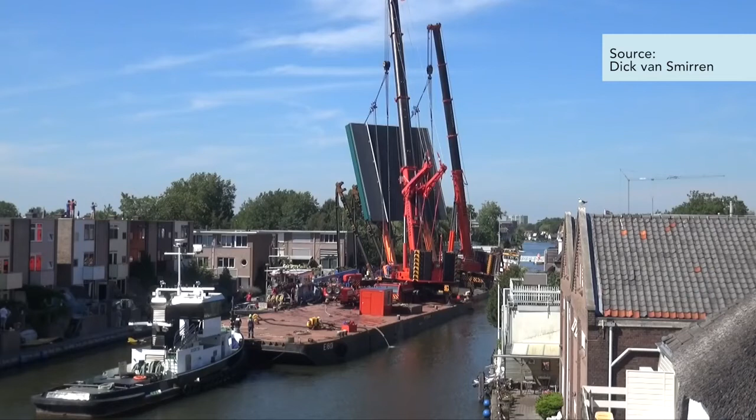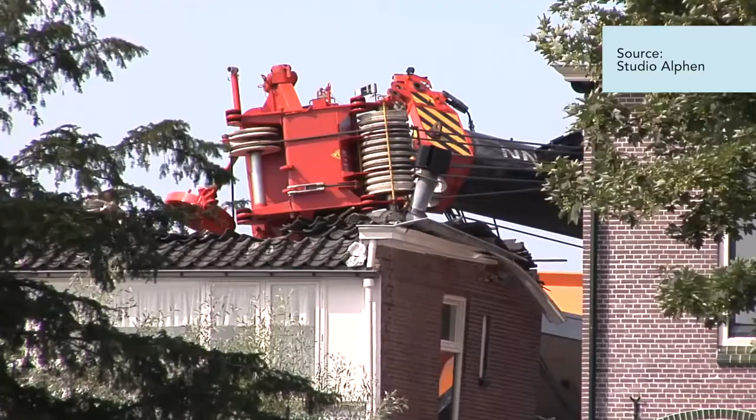On the 3rd of August 2015, a lifting rig of a section of the Queen Juliana Bridge in Alphen aan den Rijn capsized. Both cranes and the lifted bridge section fell on the surrounding buildings. Many were completely destroyed. Miraculously, no persons were injured.

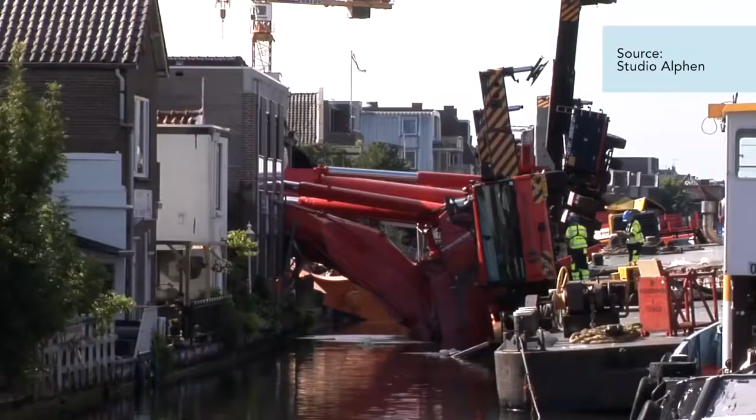Why did the lifting rig collapse? How did the parties involved assess the risks of this complex operation, and how did they manage the safety risks for the surrounding area? The Dutch Safety Board started an investigation into these questions.

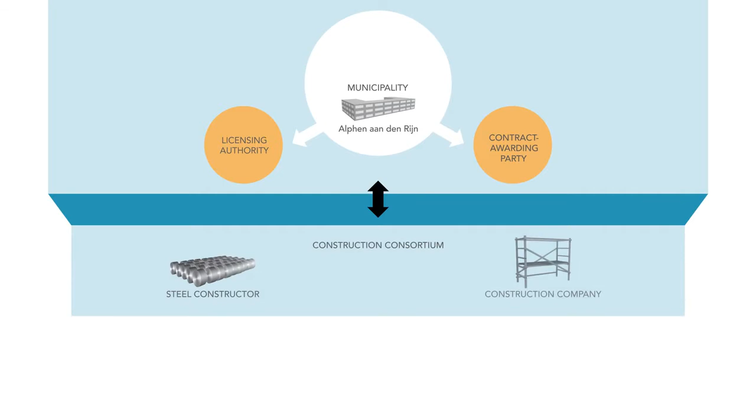The municipality of Alphen aan den Rijn commissioned the renovation of the bridge to a consortium of a steel constructor and a construction company. The steel constructor hired a crane operator to lift the bridge section. The crane operator subsequently hired the barge operator.

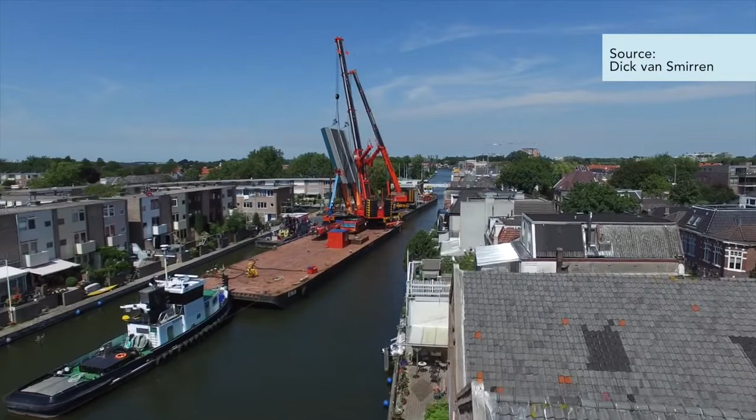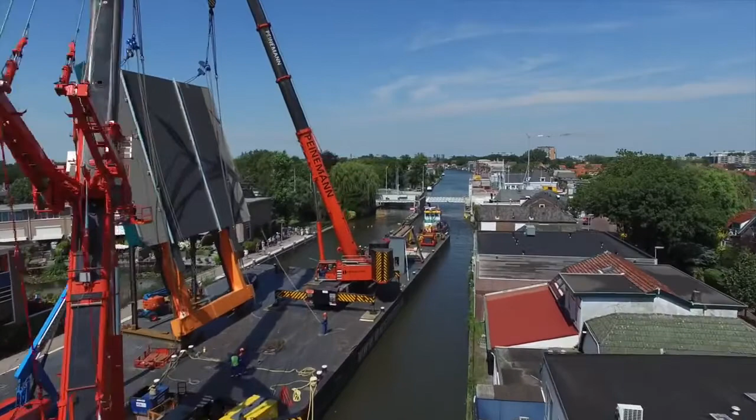A large mobile construction crane of 700 tons on the first barge and a small construction crane of 400 tons on a narrower barge were deployed for this lifting operation. The intention was to simultaneously lift the bridge section from a third barge in a tandem lift operation. The bridge section would then be maneuvered in between the two cranes before being tilted into an almost horizontal position.

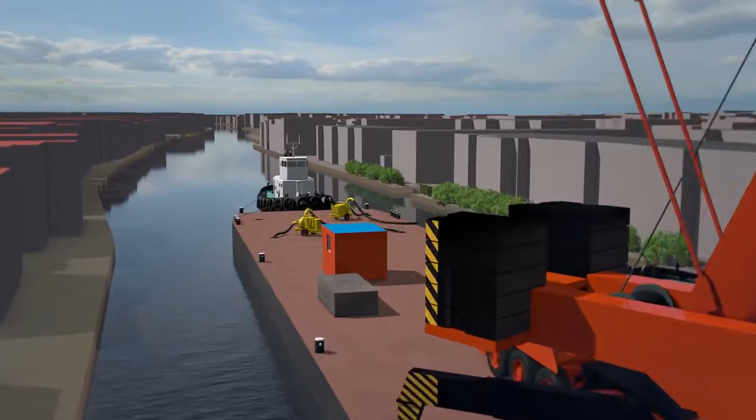The two barges would then sail 100 meters, where the bridge section was to be raised and fitted into the existing bridge structure. The crane operator and barge operator had worked together before, and they believed in the feasibility of the plan, as long as the work was undertaken cautiously and if ballasting of the barges would be done in time.

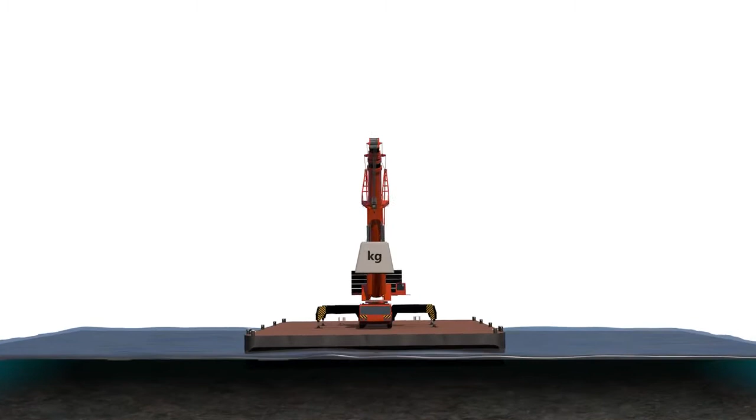Floating objects, such as barges, can move freely in water. The amount of movement depends on the stability of the rig. The more stability, the less movement, and the sooner it returns to its starting position. Stability is determined by the width and depth of the barge and by the height of the center of gravity in the crane masts.

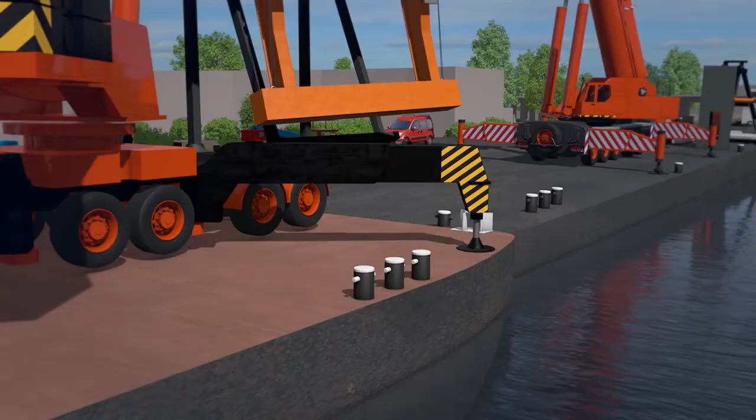The lifting rig as used on the 3rd of August, in particular the barge bearing the small construction crane, demonstrated insufficient stability and started to slope to such an extent that the mast of the crane failed, causing the crane itself to topple, thereby pulling the bridge section with it, which in turn also pulled over the large construction crane.

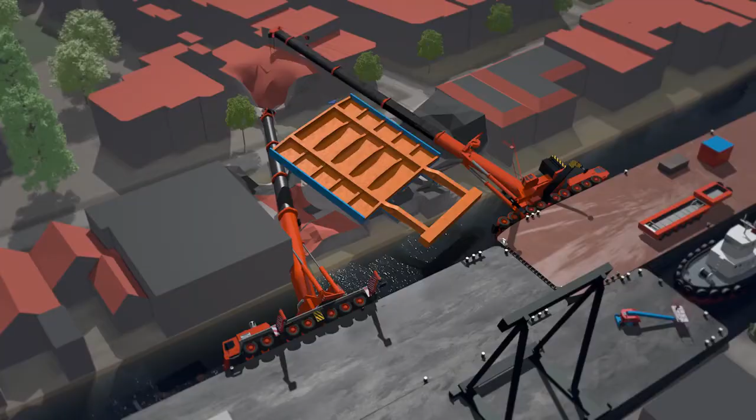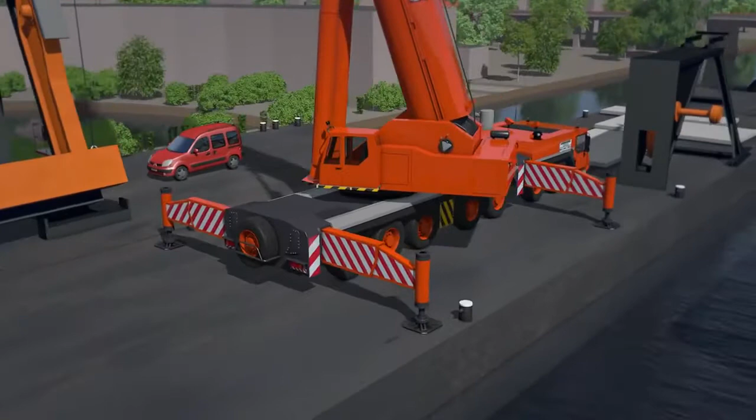The complexity of the lifting operation had been underestimated by the parties concerned. There was a lifting plan that failed on critical elements. The cranes were too high in relation to the width of the barges. In addition, several heavy objects were placed on deck, further reducing the stability.

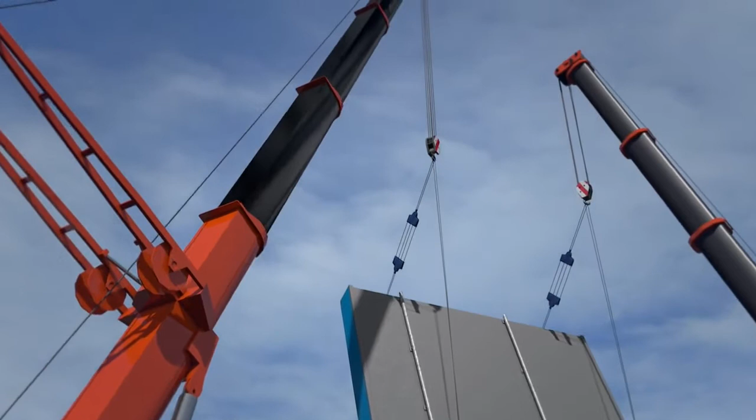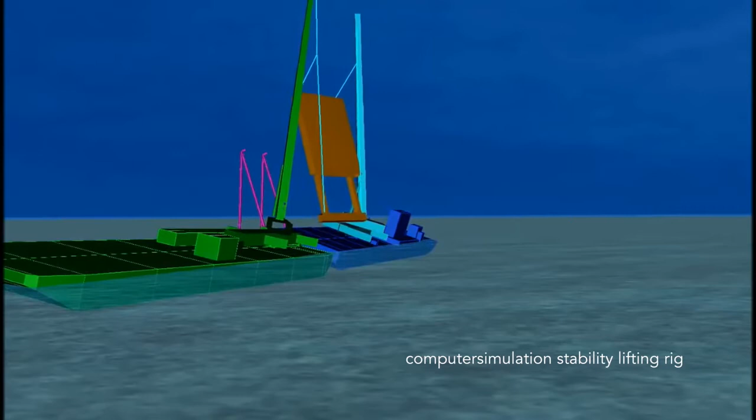There was no margin to absorb additional forces caused, for example, by natural bending of the mast of the crane, the movement of the cranes, or a gust of wind. A relatively small movement of the cranes caused the whole construction to topple. The Dutch Safety Board recalculated the initial stability and concludes that even if the lifting operation had been carried out faultlessly, the accident could not have been avoided.

The lifting rig was situated in the densely populated centre of Alphen aan den Rijn. The largest crane towered with 44 meters far above the surrounding buildings. None of the parties involved recognized that the lifting of the bridge section engendered risks for the immediate surroundings.

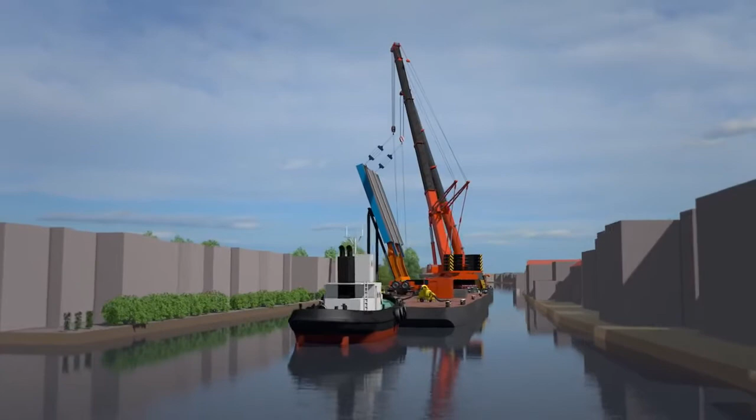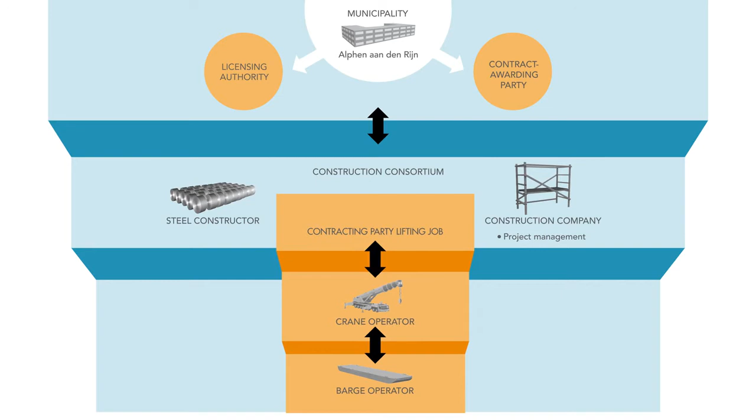Within the construction consortium, the construction company, as project manager, occupied a key role in coordinating risks. However, the construction company saw the hoisting of the bridge section as a responsibility of the steel constructor and therefore not its own. Neither noticed that the lifting plan was inadequate, and they let the lifting start with an unsafe rig. Safety focused merely on the workers and the construction site itself.

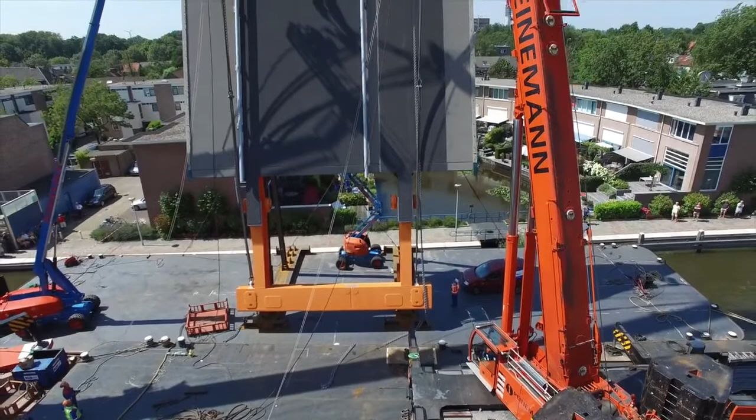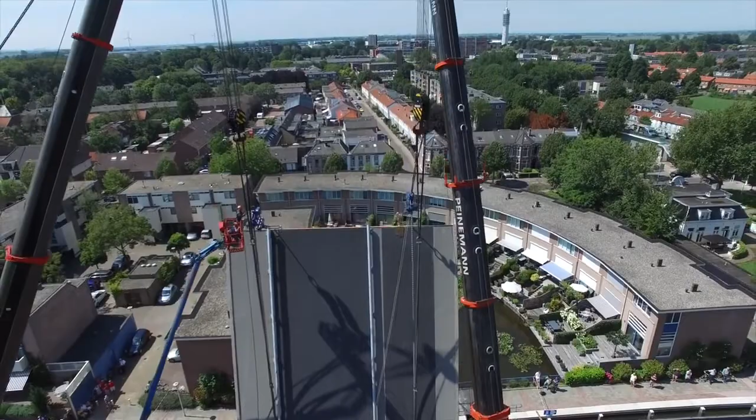The municipality of Alphen aan den Rijn attached considerable importance to avoiding additional nuisance for the local residents during the renovation work. When issuing the license for the renovation, the municipality could have demanded a construction safety plan for the area describing safety measures, but failed to do so. As a result, the execution of the work, including the lifting work and the related safety risks for the surrounding area, remained unconsidered.

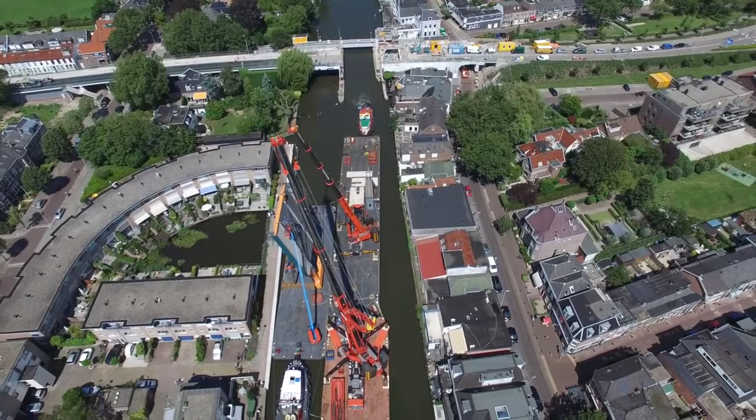The Dutch Safety Board concludes that various parties blindly trusted one another's expertise and relied on the responsibility of the other parties in the chain. This pattern was reflected throughout the project organization, from barge operator through to municipal authority.

The Dutch Safety Board has the following recommendations. To the construction companies involved: for future building projects, ensure that adequate risk management is performed for the entire construction process. To the Minister for Housing and the central government sector: ensure that in any building project one party is designated responsible for risk management. Enlist in the building decree when a construction safety plan is needed.